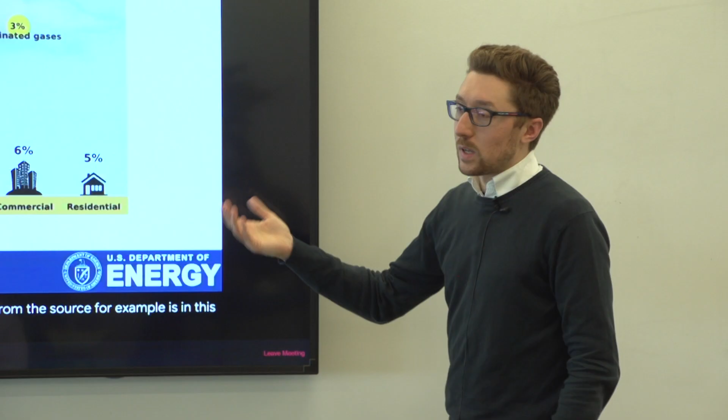So why do we want to investigate novel ways of producing electrical energy in a more green and environmentally sustainable way? According to data analysis from sources like the United States Environmental Protection Agency, for example in 2016, and this estimate probably still holds today, one of the major sources of CO2 production comes from electricity generation.

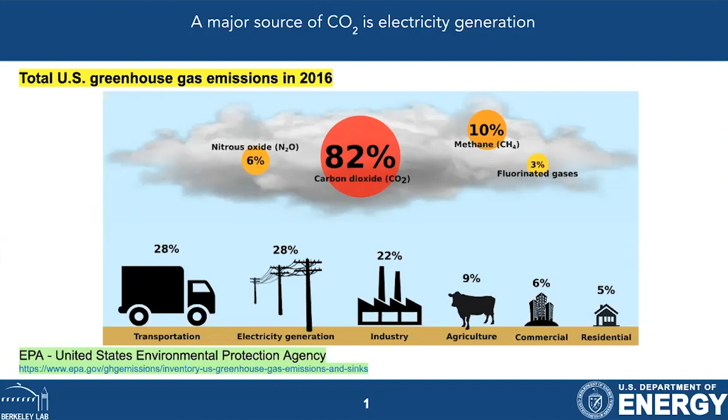CO2, as you may know, is one of the greenhouse gases in our atmosphere, and the more we artificially produce, the more the greenhouse effect increases, leading to global warming and climate change. Carbon dioxide makes up a very large percentage of all greenhouse gases in the atmosphere. So electricity generation is one of the major sources.

But how do we actually produce electrical power? Well, in the US, more than 70% of all electricity generated comes from burning fossil fuels, and this happens in thermal power stations.

The problem is that when we burn fossil fuels, the combustion generates gases that go into the atmosphere. We can filter them, but capturing CO2 is hard because it's mixed with other gases produced by the combustion. So it's not easy to capture CO2 in the standard way of electricity production in thermal power stations.

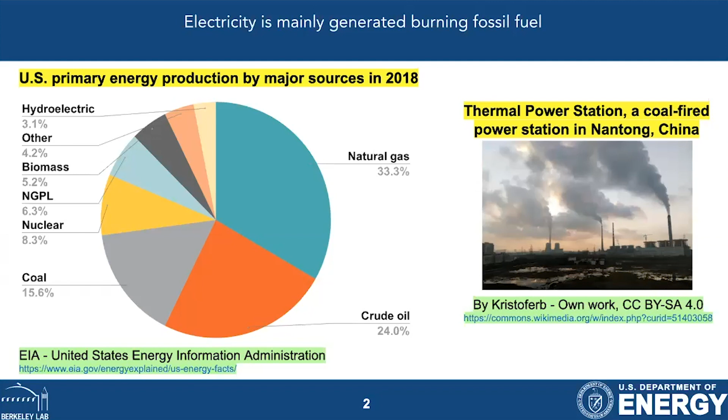So is there a way in which we can try to solve this problem, to separate CO2 from the other gases before we emit them into the atmosphere? And the answer is yes — it's represented by chemical looping combustion.

In chemical looping combustion, represented by this diagram, the oxygen needed for combustion of the fossil fuel is not brought directly by air, as happens in normal processes, but is brought by a metal oxide. The metal used is generally copper or nickel.

The metal is oxidized in the air reactor, getting oxygen which it carries into the fuel reactor. There, a reduction takes the oxygen back from the metal, and the metal is brought back to the air reactor. In this way, the stream coming out of the fuel reactor is made only of water vapor and carbon dioxide, making it much easier to capture carbon dioxide at the end of the combustion.

So we actually have laboratory scale chemical looping reactors. One example is in Morgantown, West Virginia, at the National Energy Technology Laboratory, where our collaborators are doing experiments with it.

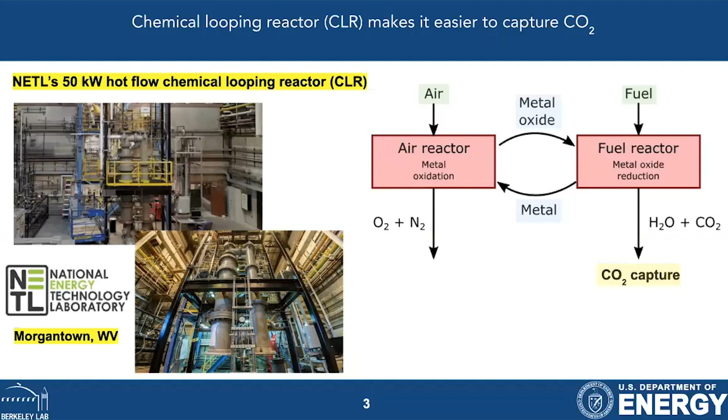It's working pretty well. So why aren't we already producing electricity from a chemical looping reactor at industrial scale? The problem is that when we try to build an industrial scale chemical looping reactor, it doesn't work as expected. So at the moment, we cannot do industrial scale production of electricity with chemical looping reactors.

This is the reason that motivates the adoption of numerical simulations — because we want to understand why it works pretty well at laboratory scale, but doesn't work anymore when we scale up to industrial scale. Only numerical simulations can give us insight into the physics of the problem, what is going on point by point.

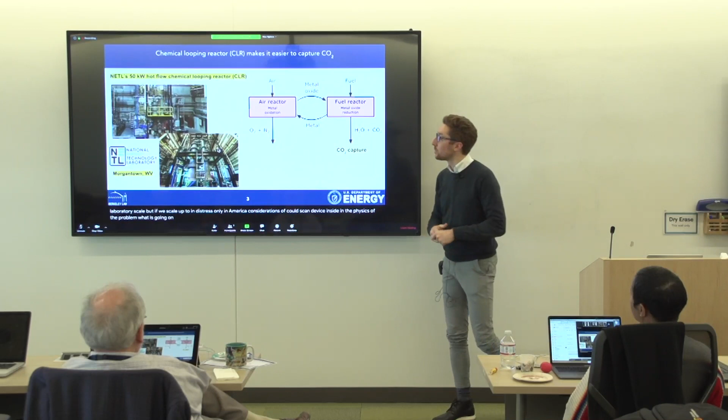This is a more detailed scheme of a chemical looping reactor. And we actually already have software for simulating chemical looping reactors.

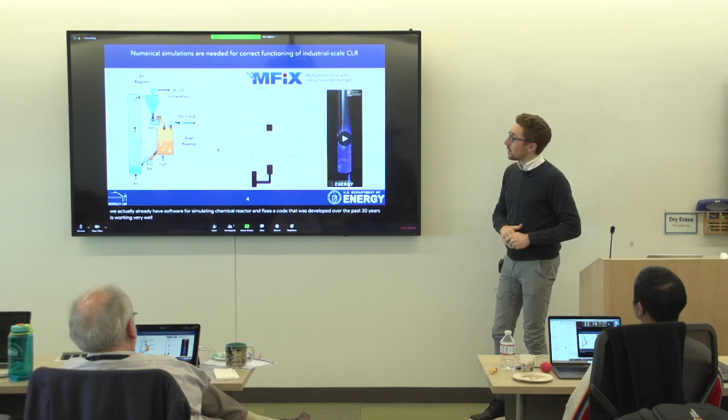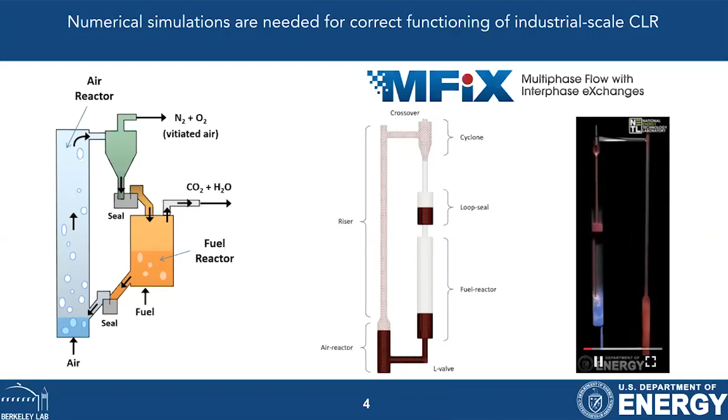MFIX is a code that was developed over the past 30 years, is working very well, and was developed specifically for solving problems of reacting multi-phase systems. The video is showing that we're already simulating chemical looping reactors, so we have it.

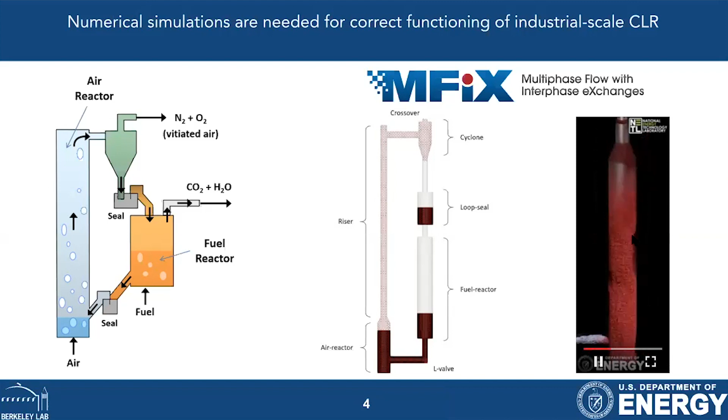We should be able to design industrial scale chemical looping reactors. Well, the answer is not yet, because the problem with MFIX right now is that to simulate industrial scale reactors, we have to simulate around 100 billion particles. Our goal is to have a simulation of more or less 5 minutes in real time, with a simulation time of 2 days at most. This is extremely computationally expensive, and it's a challenge. MFIX right now is not able to perform in this way.

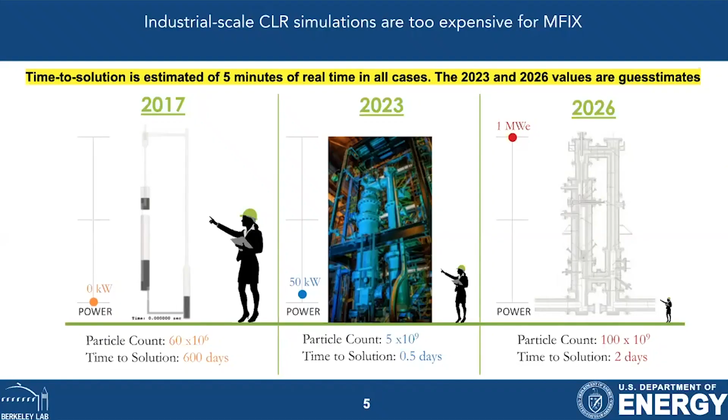So this is how MFIX-Exa was born, to solve this problem, in the sense that we want to couple the potentialities of MFIX with the potentialities of AMReX. So being able to run our code on modern supercomputers, and also make our code ready to run on the next generation exascale supercomputers.

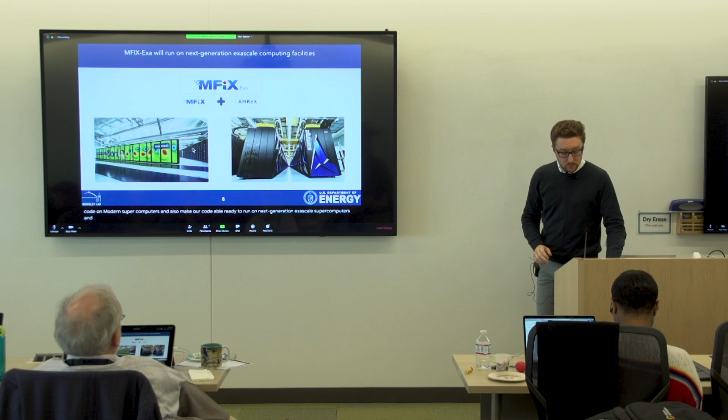And this is also the first part of my work here in the lab. I was working on parallelizing MFIX for making it ready to run on GPUs and hybrid MPI-GPU environments.

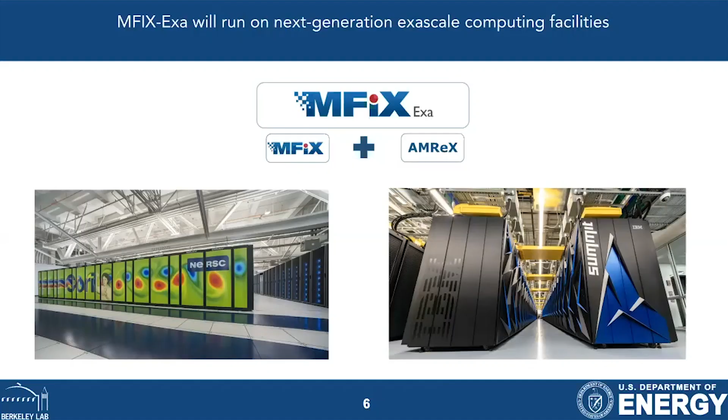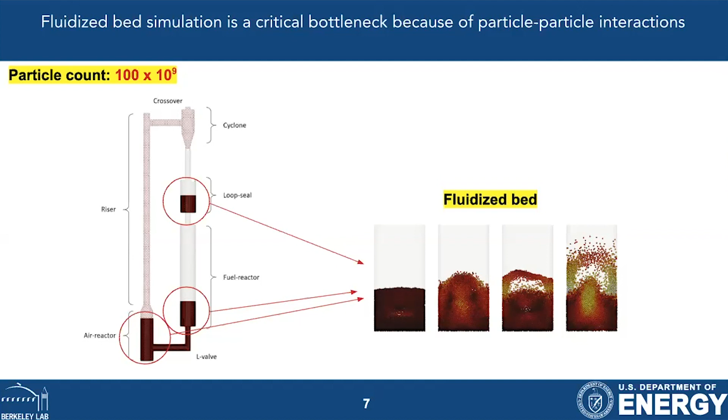But is this enough? Once we already have our code on GPU, is this enough for what we want to do, to simulate like 100 billion particles? Well, the answer is probably not, because right now we are modeling particles in a very accurate way. We keep trace of interaction, particle by particle interaction, so all collisions, and interaction with walls and everything. But the bottleneck is actually particle-particle interaction, especially in fluidized beds, because here we have a very high solid volume fraction. If we have billions of particles and we have to understand how they interact with each other, it's extremely expensive computationally.

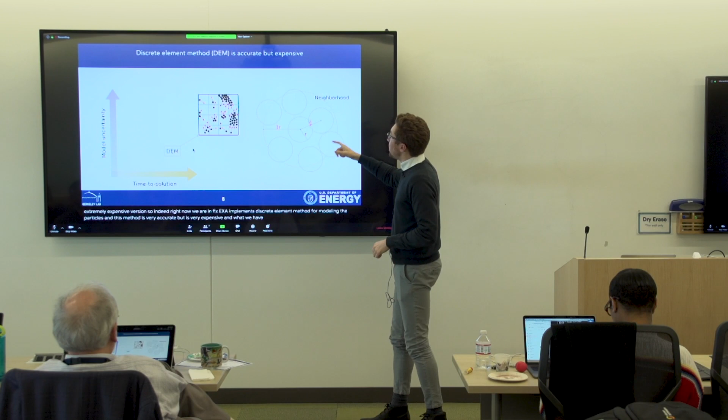So indeed, right now MFIX-Exa implements a discrete element method for modeling the particles. This method is very accurate, but very expensive. For each particle we keep trace of a neighborhood, so all the neighbor particles whose center is within a certain distance from the center of the particle we are considering. A collision happens when two particles overlap.

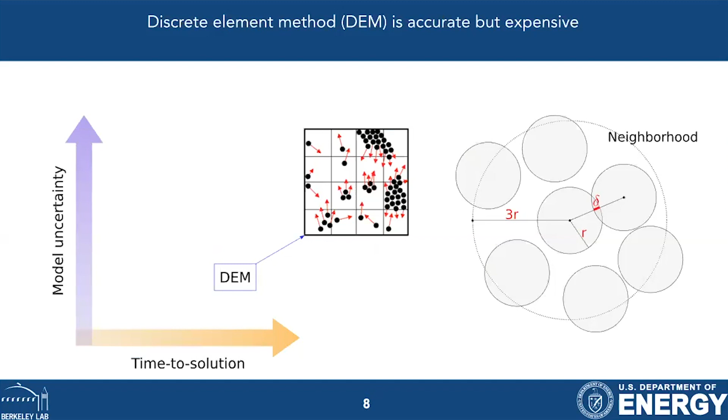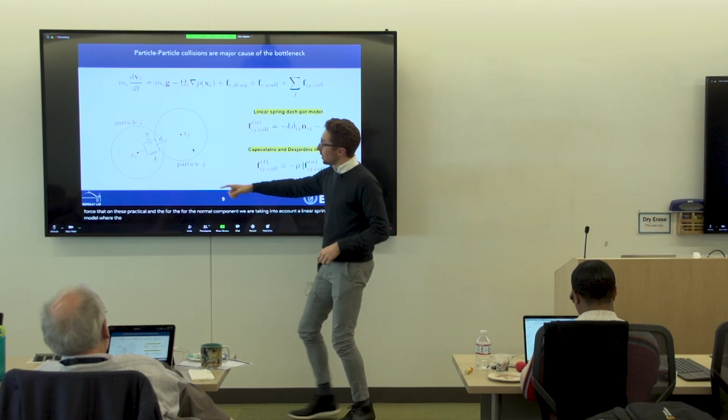How do we compute the interaction? We have a normal and tangential component of the force that act on this particle. For the normal component, we are using a linear spring dashpot model, described by this diagram. For the tangential force, we are using a Capecelatro and Desjardins model.

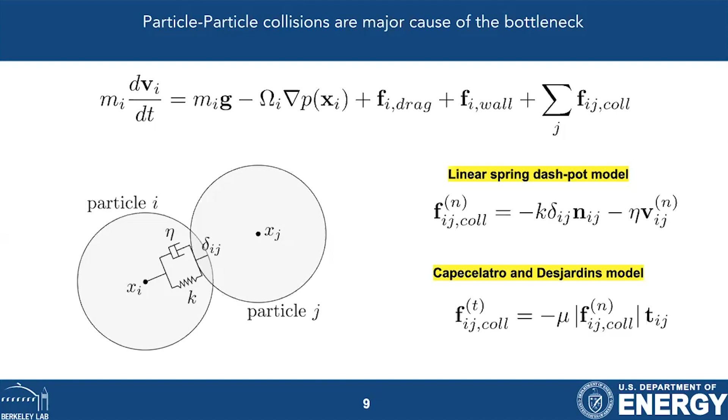This is some simple example of how it works. This is an interaction with the wall, where we have a perfectly elastic interaction. And this is an example of collision between two particles.

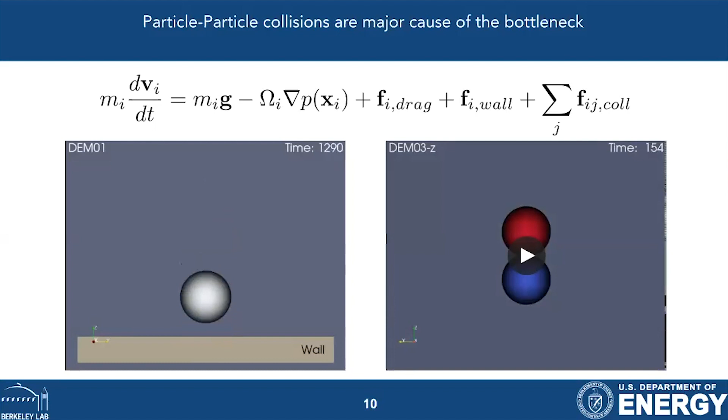So this is very accurate, and we want a code that is actually accurate, but the question is, do we really need to be that accurate in a fluidized bed? When we have so many particles all together, do we really need them to be so accurate? Our guess is that no, we don't need to be that accurate in a fluidized bed, and for this reason we are taking into account the particle-in-cell approach.

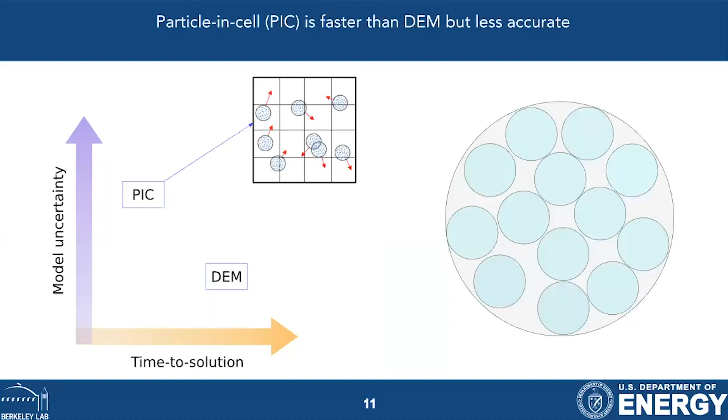Particle in cell approach is less accurate than the discrete element method, but is much faster. In this method, particles are grouped into parcels, and we don't need to compute parcel interactions. So why?

Because in this case, the linear continuum equation of linear momentum conservation is more or less the same as before, but the biggest difference is that now we don't have any more collisions between particles. Instead we have another force that replaces that kind of collision, in the sense that this force is proportional to the opposite of the gradient of this interparticle stress.

This stress is computed as a function of the solid volume fraction. So if we have a region where the solid volume fraction is very high with respect to the neighboring regions, we will have a gradient, a force represented by the gradient of this stress, and that force will move the parcels from the region of higher solid volume fraction to the region where the particle volume fraction is lower.

And this model is the Snider interparticle stress model.

So now we have one model, the discrete element method, which is very accurate but expensive, and this other model that is not that accurate but much faster.

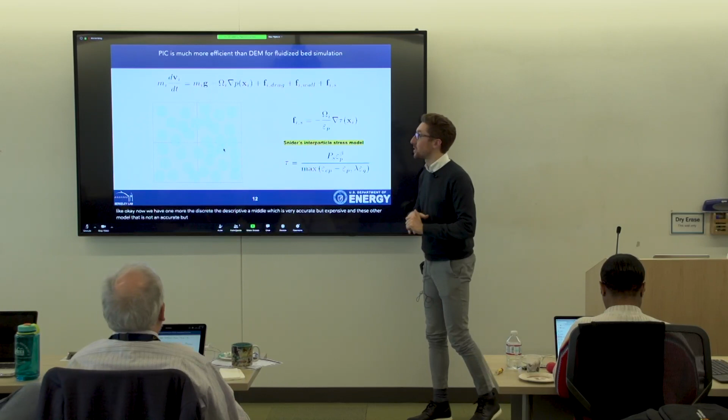But in our chemical looping reactor, we don't have just a fluidized bed. We have other regions where we need to be accurate. We need the code to perform, to simulate the phenomenon in an accurate way.

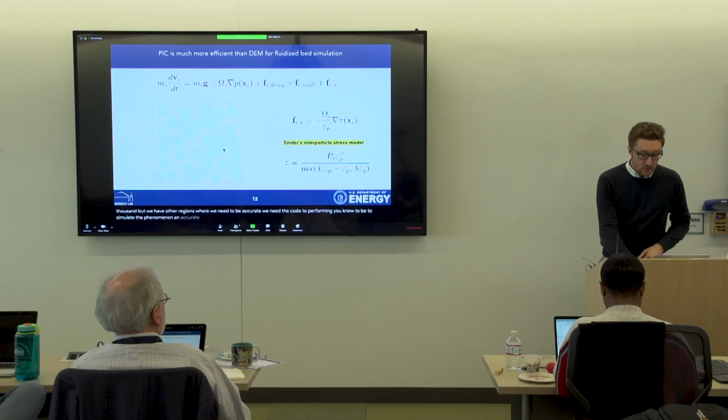So the idea is to divide the problem and use this hybrid approach. We want to use the discrete element method in the more dilute region where we need to be accurate, and the particle in cell approach in the fluidized bed where we don't want to be that accurate, but we want to be fast.

The problem is the intermediate region, the transient part between one and the other, because here we have to decide how to model the interaction between particle and parcel. In particular, if after the interaction they move up to the discrete element region, or down to the particle in cell region.

In the first case, if they go into the discrete element part, we have to break the parcel into all the particles that compose it and treat them in a discrete element method way. Conversely, if they go down to the particle in cell, we have to include the particle in the parcel and treat everything as a parcel.

So this is something I still have to investigate. I just finished implementing the particle in cell method, and we still need a bit of testing. This is something I'm working on.

Finally, I would like to show some results about the performance of our code right now. For a prototypical CLR on one Summit node using the discrete element method, if we take as reference a simulation with 36 MPI tasks, right now with load balancing, we can reach a 54x speed up.

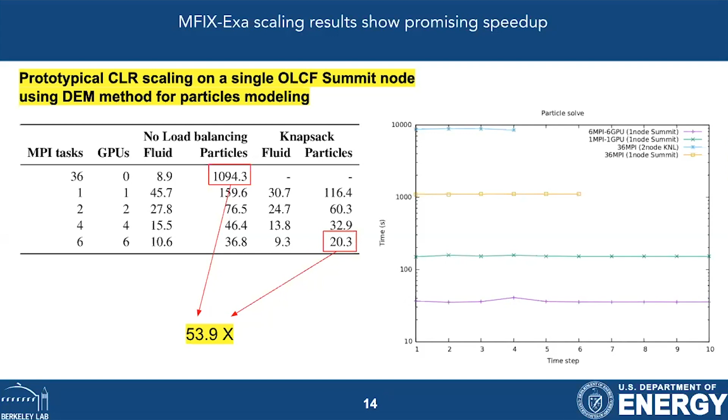With knapsack load balancing, you can see that the cost per time step is pretty constant, so this speed up is constant time step by time step. This is the reference simulation, and this one is the best performing one.

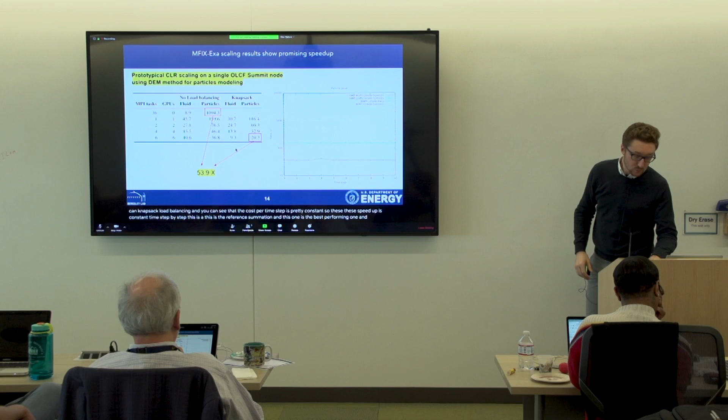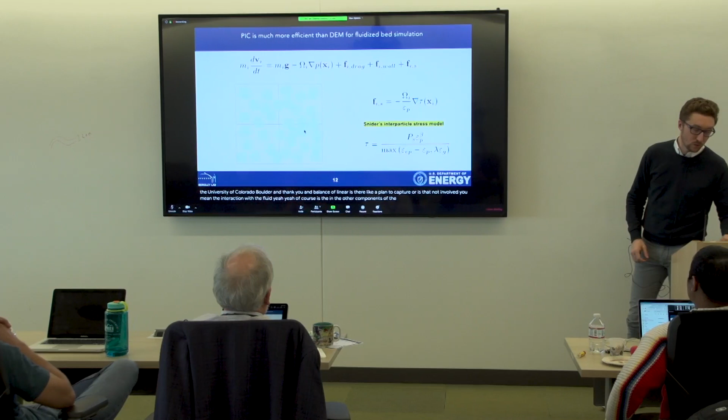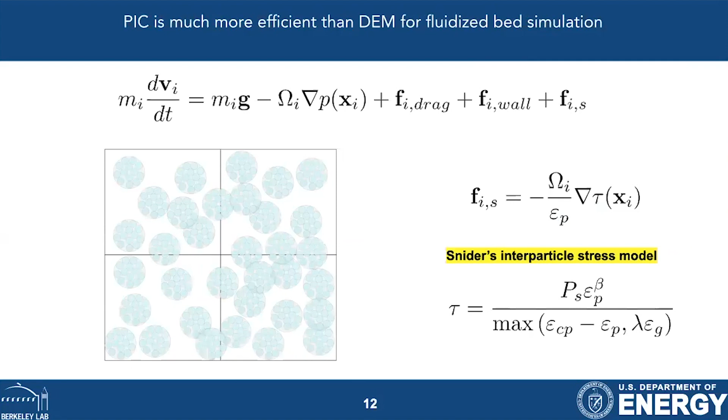So the equation you showed was a balance of linear momentum of the particles. But is there a plan to capture the hydrodynamic interactions as well, or is that not involved? You mean the interaction with the fluid? Yeah. It's in the other components of the force. For example, the drag is the solid-fluid interaction, and you also have the gradient of the fluid pressure that is also acting on the particles. So you take into account both for the discrete element method and for the particle in cell. But right now, you don't care about what the fluid is actually doing.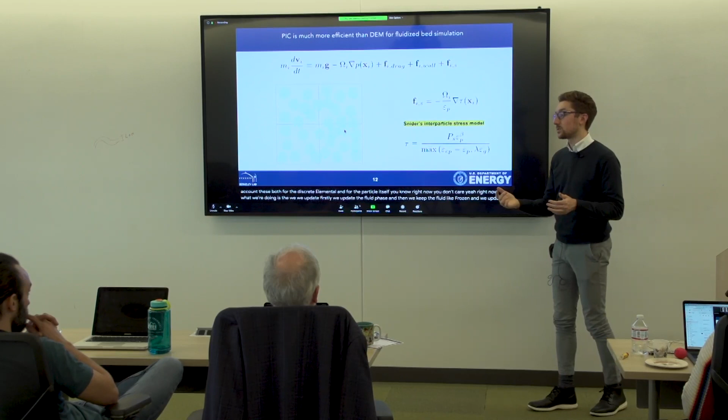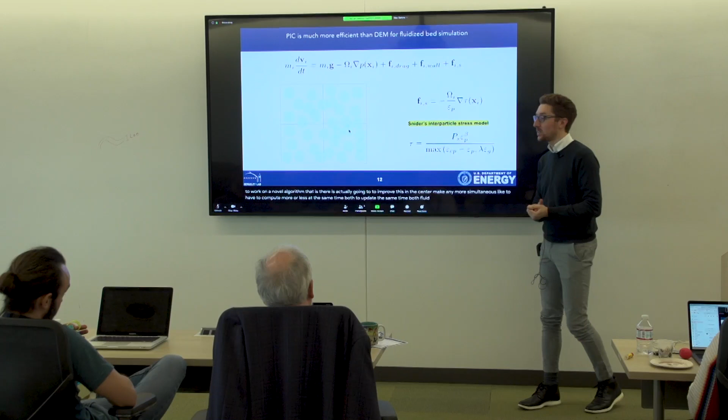So right now what we are doing is we first update the fluid phase, and then we keep the fluid frozen and update the particles in one simulation step. But Michele and I have a plan to work on a novel algorithm that will improve this by making it more simultaneous, computing and updating both the fluid and particle phase at the same time. So that's something for the future.

Comment one is, I think you win the most absurd captions prize. Sorry? The captions - from Roberto Cuckoo to Taco John to beheading somebody.

Okay, but there's actually a serious question - you may have said this and I got distracted. What are the most important guiding principles in this transition region? Do you have a physical feel for that? We want to conserve momentum, right - that's obviously important. We're changing from one representation to another, it's obviously an approximation. Do you have a sense of what's most important? Conservation of momentum is obviously important. What else? Do you have a feel for it, or does it just kind of come out in the math?

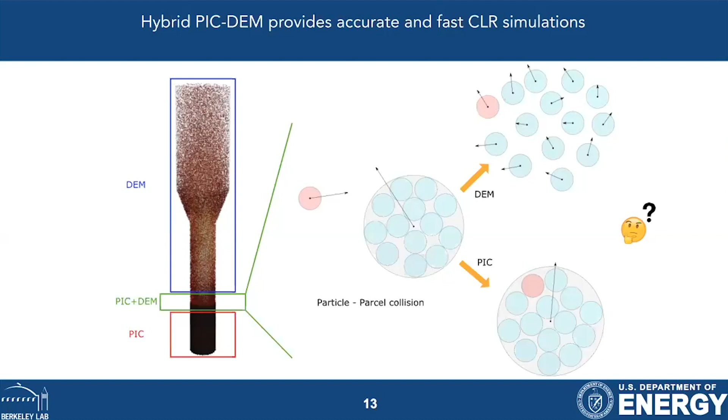So if I understand correctly, in the PIC you still have the same particles - this is different from coarse graining, right? You still have your same particles. It's all about the interparticle force? It's about how now you don't compute the interparticle force - you just update without taking into account collisions, you just consider this solid pressure that moves particles to regions where they are more dilute. And is your concept that in the intermediate regions, some particles will collide individually and some will feel the stress? Yeah, that's a good point, it's indeed important.

Yeah. I have to think about it. I don't know now how to answer that question.

So you do two things when you switch from DEM to PIC: you gather the particles into parcels, and you stop computing the interaction one by one, or by pairs. Which of the two is more expensive in the work you did? If you did not group the particles into parcels, is that expensive? Let me rephrase that - what's more expensive, having more particles or being able to do pairwise interactions?